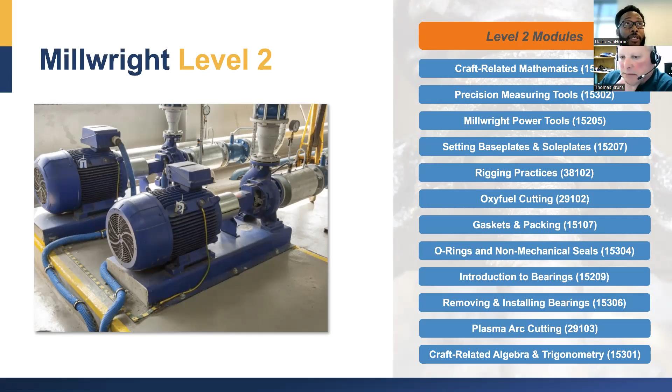Thanks for that, Tom. And like Tom mentioned, one of the strong ideas here was to make sure we present a logical approach to the information the trainees will have access to, both in order and in relevance to what they'll be required to know when they're in the field. So let's go ahead into the next slide.

Okay, and that would be level 3 of Millwright. Again, with each step or level, they're getting a little more of the technical skills. The previous one was 175 hours with 37.5 hours of electives. Level 3 is also 175 hours with 37.5 hours of electives, including troubleshooting and repairing pneumatic equipment, advanced mechanical drawings, and vibration analysis.

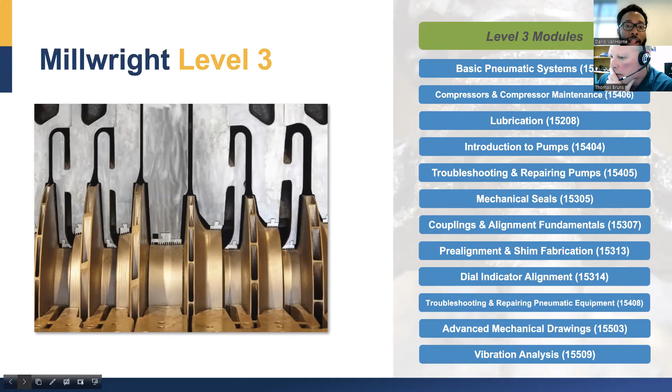We can go over to level 4, and that one is my favorite to discuss because this is when the work gets real, and also the one I remember a little better since it's the most recent one we worked on. Level 4 ensures students receive more current and relevant training. The 3 modules that stand out most are belt and chain drives, troubleshooting and repairing conveyors, and preventive and predictive maintenance. These are skills trainees will probably see listed in a job post.

Belt and chain drives requires them to figure out installation processes and alignment processes. It introduces them to the use of laser-based tools, and provides comprehensive information on drive belt types, identification, installation, tension adjustments, and measurement tools.

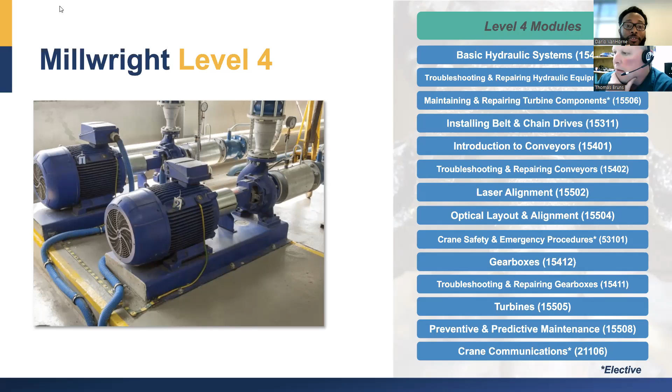With troubleshooting and repairing conveyors, they are introduced to many safety practices, strategic approaches to repairing conveyors, conveyor belt tracking problems, and the corrections they would implement, belt repairs, splicing hardware, and chain conveyor maintenance.

And with preventive and predictive maintenance, the module helps them go into both types of program. It includes discussion of tribology, lubricating oil sampling and testing, and the 8 predictive testing and inspecting approaches they can take when presented with a situation in the facility. These skills help maximize equipment reliability, and that's mostly what a Millwright would be required to do.

Go ahead, Tom, I see you want to say something. My main ones out of here were basic hydraulic systems and laser alignment, two that are near and dear to my heart.

Technology is getting better all the time, and a lot of alignments are being done with a laser tool instead of the dial indicator. But we wanted to leave the dial indicators in level 3 so people understand the process, and then use the technology going forward in the future.

We could go through and debate which one's the most important, but all of them are important. So were there electives in this one, Dario?

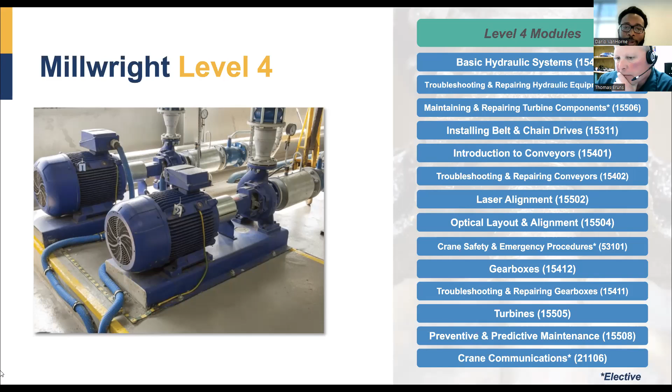So could we go ahead and look at one of these videos? And sorry, Tom, surprise—Tom was our major SME in the making of both the content and these videos. You'll get a chance to see a little bit of Tom explaining some of the concepts, and these are the videos that instructors would have access to.

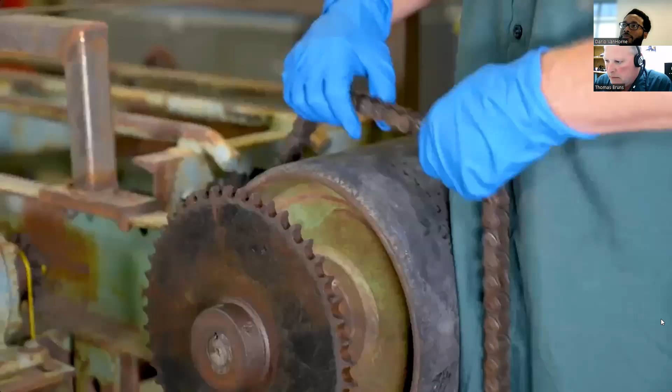Sprockets alignment is going to be very similar to aligning sheaves. Same reason as the belts, but with a chain and a sprocket, since there's metal to metal contact, we're going to get wear on one side of the sprocket or the other, on either the drive or driven sprocket, or we'd look on the inside of the chain for wear on either side. Especially in higher speed chains, that's very noticeable. It wears out our sprockets, so to get maximum life out of our sprockets and chains, we need to align the two sprockets.

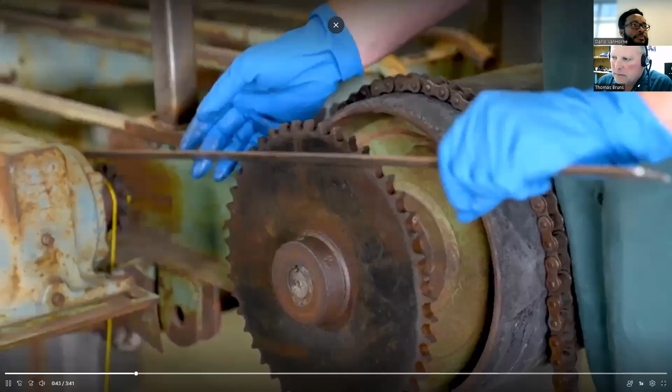The first thing we'd try is the straight edge, but it's not going to fit down in there with the gearbox on either side. So that's an obvious example where we can't use that. We could use the laser here, but we did that with the sheaves. So we grabbed this opportunity to use the string line. We're going to pull the string line from that sprocket over there in a straight line across and look for 4 points of contact. With this small sprocket, it's very hard to get the last 2 points of contact, but we're doing the same process as with the sheaves.

Pause for a second, please. Right direction - when it turns that way, it's not going to catch.

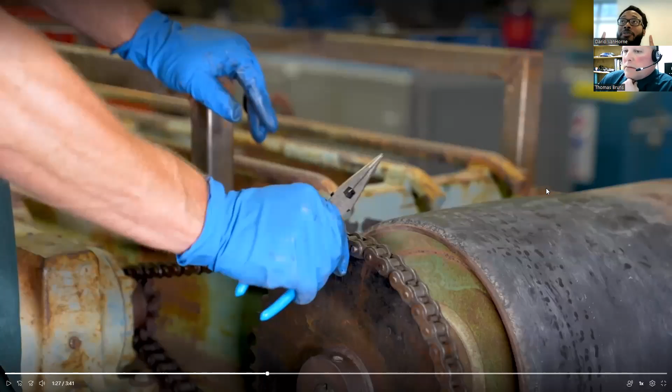This is not the complete video, we're skipping around because it's a 7-minute video and I don't want to show you the entire thing. The main feature I want to highlight is, number one, we're showing the process. Number two, we're showing the typical questions trainees end up having as they approach the process. And third, it's going to cut away into some of the math involved in the process. As I said, it's not going to show the entire 7 to 10 minute video - we cut it down to about 3.5 minutes to highlight the main components.

So Avery, you can continue the video. Let's watch till the end. The open end is this way.

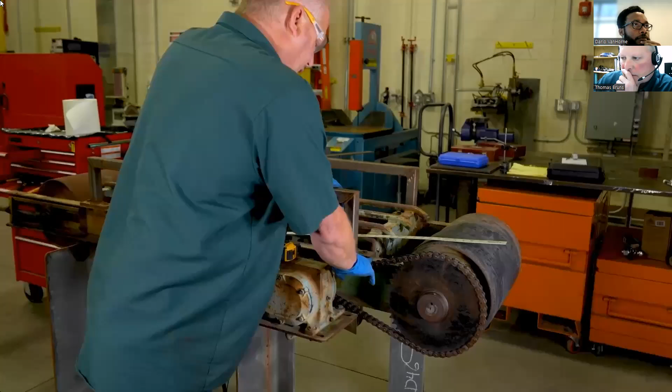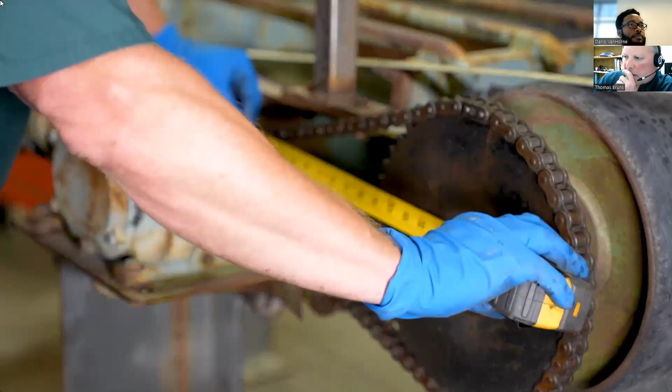Setting the proper tension on a chain has to do all with the deflection or the sag of the chain. We look for anywhere from 2 to 4% deflection on chains. Higher speed chains need less sag, closer to 2%, and slower speeds can go up higher. We're going to go right in the middle of this application, 2 to 4%, halfway in the middle is 3%. So we do similar to what we did with the belt sheaves and belt tensioning - we go with our center to center distance, or span, center of shaft to center of shaft. We take our measurement, put our 1-inch mark at the center of the shaft back here, and we come to 15.5 here, but with burning an inch, we're down to 14.5 inches.

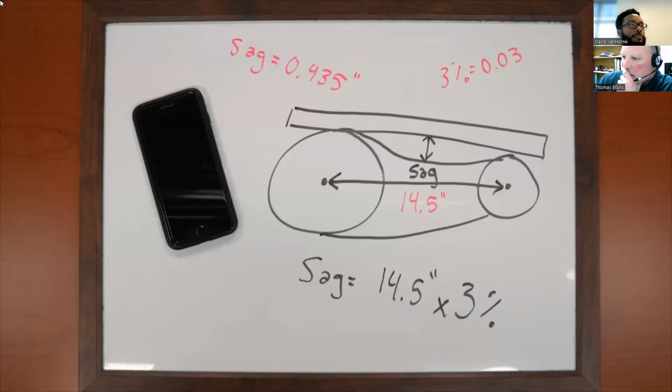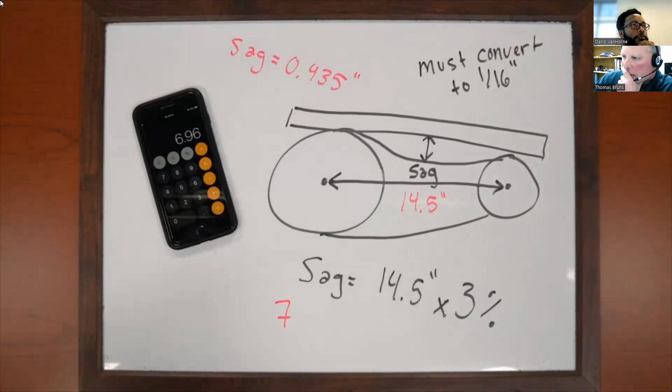But we've got a problem - most rules are marked in standard fractions like 16ths, so we've got to convert the decimal fraction back to a standard fraction. That's easy: to convert it to 16ths of an inch, hit multiply, enter 16, and hit equals. Round the result to the nearest whole number, 7. That means the sag should be adjusted to 7/16 of an inch. And that's all there is to it.

To check the actual sag, we want to go to the center of the span, and we're going to use any sort of straight edge up here just to have our distance there. Then we push down on the center and measure how far that goes down. So I'm reading from the 0 mark, and we are at 7/16 of an inch - our sag is set perfectly for this application.

Thank you for sharing that. I tried to highlight more or less what you get with each one of the processes that we went through with Tom: recording what the process looks like, what the objectives are, and in many cases when there is math involved, what the math breakdown is, showing the trainees exactly what they would need to do to perform this on their own. Tom, do you want to add something to that?

The idea came about because of the pandemic. When the pandemic hit, so many educational places had to go with no contact or limited contact. So as a team we decided the best way to tackle this problem would be to make videos to help students and instructors understand how to do some of these things. That's where the idea came from and built from there, with what we could do and what we couldn't do.